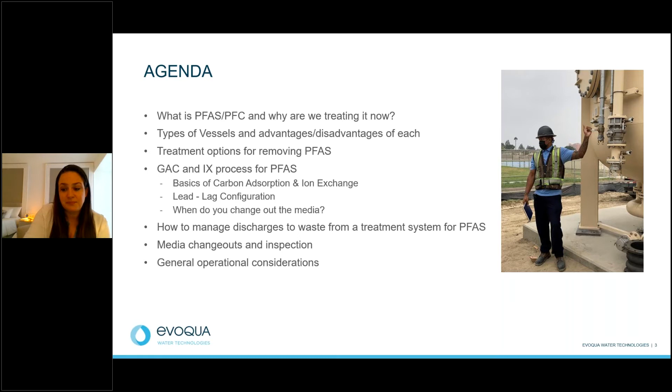As an operator and just general operational considerations. So that is what we'll be spending the next 2 hours reviewing. I'd like to stop every maybe 20 minutes and see if there's any questions, discussion, and then we'll just keep going. So know that although we're here for 2 hours, there will be moments that you get to break and breathe a little bit. With that being said, I'll jump to the first thing.

So what are PFCs? PFCs, also known as per- and polyfluoroalkyl substances or PFAS, were used and are still being used in stain, oil, dirt-resistant materials, firefighting foams. Anything that has some stain or water resistance is what's kind of using it. We've probably heard of Teflon and things like that. It has wonderful properties for being resilient and not breaking down. And that's the exact reason why now it's an issue to treat. They stay for a long time. You may have heard of them as forever chemicals because of this wonderful quality to not break down too easily, which makes them great for a consumer product, not so great later on in the environment.

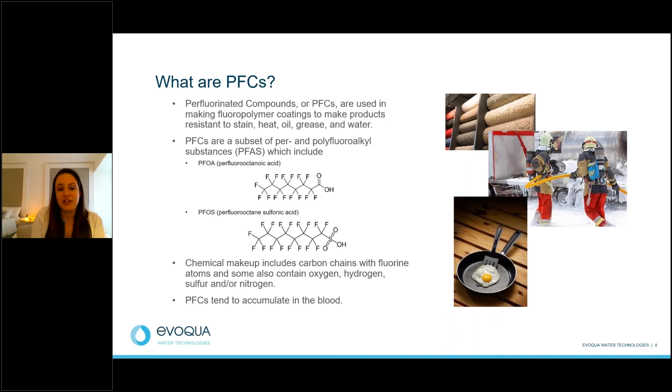They are made up of a carbon chain with fluorine atoms, some oxygen. And the reason they're of a concern right now is they don't break down very easily and they tend to accumulate in the blood. It has been found everywhere in the world, including the Arctic and Antarctic. It's just pervasive, it's everywhere. And the reason it's a concern now is it's been linked to effects in growth, development, reproduction, some cancers, non-Hodgkin's lymphoma. They're still in the early stages of studying it, but it has been linked to some hormonal and immune issues.

So in 2016, the EPA came up with some lifetime health advisories for 2 of these compounds. Taking a step back, there are about 5,000, potentially more, compounds that fall under this group of chemicals. The 2 that we're most concerned with right now because of the current regulations are PFOA and PFOS. Back in 2016, the EPA came up with a lifetime health advisory of 70 parts per trillion for the combined concentration of PFOA and PFOS. Again, those are just 2 of the thousands of other compounds in this family. It was non-enforceable, non-regulatory, but it started to create health awareness and concern.

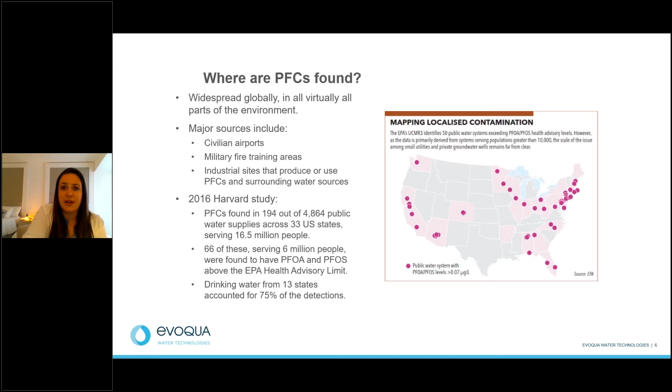And drinking water from 13 states accounts for 75% of the detection. So it is a little bit localized. And in Southern California, we're definitely feeling it.

So the next part of my presentation will be talking about the types of vessels that are used. Probably a little bit out of order for this presentation, but traditionally what we're seeing in this area is using either carbon or ion exchange as a treatment solution. So I'm going to talk about the types of vessels that are out there for use with carbon, ion exchange media, and potentially some novel sorbents depending on what those are. So I'm going to jump into a little bit about the different types of vessels out there and the advantages of each and challenges of each.

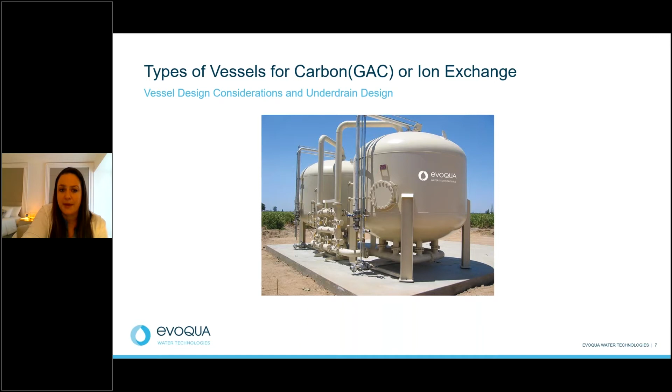So going back a little bit, most of us have seen these large vessels. They tend to be 10 or 12-foot diameter vessels. With PFAS, the larger vessels are a little bit more popular, and I'll get into why that is. But this is what they look like. The footprint is roughly, for a system, which is 2 vessels and the piping, roughly 14 feet by say 25 feet, somewhere in that range for a single system. And a system, when I talk about it, is the 2 vessels with the interconnecting piping tree and piping. So as this picture depicts.

So when you're considering a vessel, you want to look at the under drain design. There's several different under drain designs, and I'm going to touch on 3 of them. The things you want to consider are the flow distribution. Are you getting complete usage of all your media? Are you minimizing pressure drop? In other words, are your pumping costs going to be impacted by what you choose? How easy is it to perform a media change out service? How easy is it to maintain the vessel? Are you going to be in there replacing parts all the time, or can you plug it in and not worry about it for years and years?

Also, speaking of maintenance, what about the vessel lining and other parts that may need repair and maintenance over the years? And lastly, vessel height. Sometimes these are in residential areas. You may want to consider the height of the vessel and how that might impact the residents nearby or building regulations.

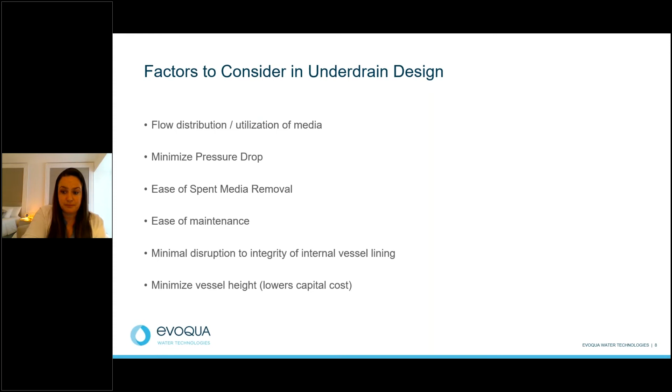So the 3 under drain designs I'm going to focus on today are the hub and lateral, the internal cone, and the external ring header. The picture I showed a couple slides back is the external ring header. That is the one that Evoqua predominantly offers, but we can provide the others as well. And each system kind of has its pluses and minuses.

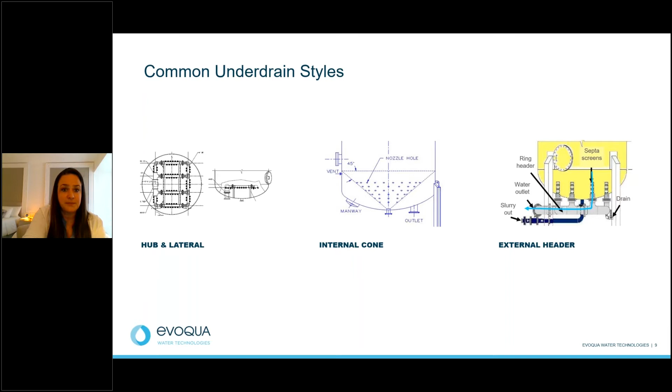All right, so first we'll dive into the hub and lateral system. The advantages of this system, let me go back to just what it is first. There is usually like a center line and then a bunch of radials, or in this case, kind of like an H pattern, where the water goes through this hub and lateral system with a bunch of nozzles to collect the treated water. So this is at the bottom of the vessel. The media sits atop it. The influent untreated water comes in the top, goes down to the bottom, and then the clean water goes through these nozzles, then through this network of pipes and out the effluent.

What's nice about this system is it does have good flow distribution because there's lots of nozzles, tends to have a low pressure drop, and because it sits within the bottom of the vessel, it just kind of gets bolted. You can see the crossbars there where it's attached. You can line the entire interior in a single coat. There's no additional seams, and then this unit sits there. So it's good from a point of internal coating being one consistent piece.

Disadvantages: large number of nozzles. If you're going to do maintenance and have to replace a broken nozzle, which sometimes happens, you'll have to evacuate the media, you'll have to do confined space entry, and it could be a little bit more maintenance. Also, it's a little bit more challenging to do a media change out because you have to work around those laterals. Not terrible, but just something to consider.

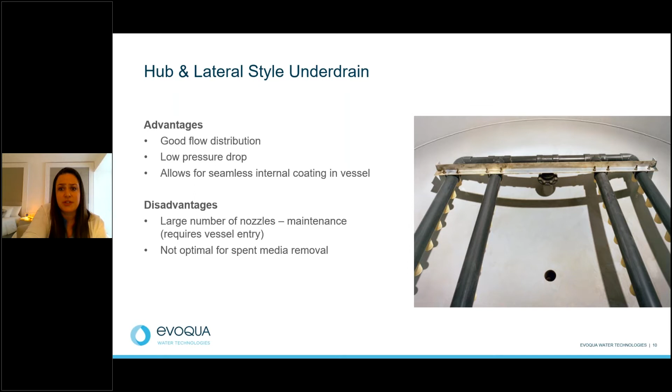I do not oftentimes see this design in the size systems that most municipalities are using these days. You know, larger flows, I don't see this too much. The next two are what I most commonly see in most municipal drinking water systems. The next design is an internal cone style underdrain.

From the outside, it looks like a large cylinder. They tend to be a bit taller because inside they've accommodated for this cone. And the cone has many nozzles. I think in a 12-foot system, there's somewhere around 120, 130 of these little nozzles. The advantage of this design is good flow distribution. Got a lot of nozzles, a lot of flow. You're really getting your media used.

The disadvantages of this one are, again, there's a lot of pieces here, right? You've got 100-something nozzles, so there's a greater chance of something breaking. And to make a repair, you have to do confined space entry. The other thing with this design is there's the outside shell and then this internal cone. So you have to do confined space entry under the cone to change out the nozzles. I've had some customers where you have to clean out that under kind of dead space on occasion. So maintenance could be a little bit challenging with this design. But overall, great flow distribution.

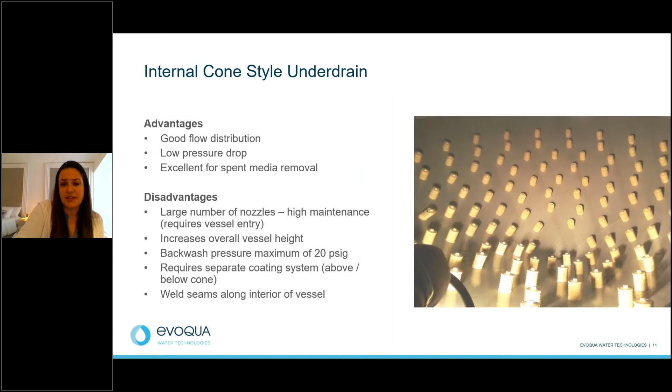Okay, one more question. Where does the cost lie in pros and cons of the different systems? Okay, so hub and lateral, I think, is the least expensive. Cone bottom versus septa, they seem to be pretty similarly priced in the market. So equipment wise, very similar. It kind of comes down to preference of design, and then maybe some height restrictions, right? The cone bottom is another 4 to 5 feet taller than the underdrain design, so sometimes that presents a challenge.

Okay, that's all the questions we have that I see right now. Okay, then we'll keep going.

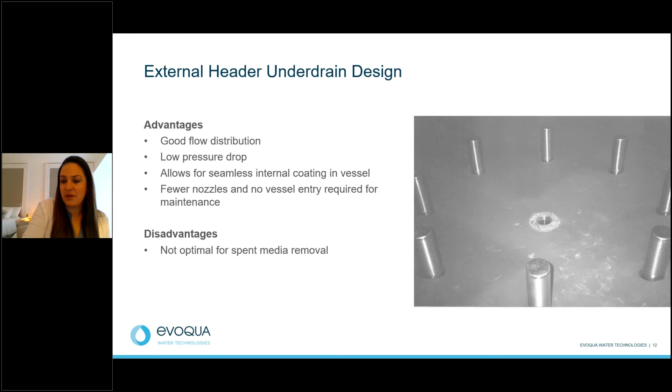The next thing I'm showing here is, depending on whether you're using ion exchange resin or carbon, you may need a distribution header at the top of your vessel. Resin, when it's flooded, gets very fluid, right? It's very light and fluffy, and it likes to move. So you have to do an inlet distributor. Now this is at the top of the vessel, so the water's coming in the top. This inlet distributor diffuses it and causes it to spray, so that it's not just pounding down on the resin and potentially moving it out to the walls. If you picture it just shooting down from the middle of the vessel, it would cause all the media to expand out and create kind of like a canyon in the middle. And then you would get short circuiting, you wouldn't get the best use out of your resin.

Now carbon is a little bit more stable. You don't need quite an elaborate inlet distributor. You can do more of a single point with a hat that still causes the spray, but you're not so worried as with resin. Resin moves quite a bit once submerged.

The reason to touch on this is you want the top of your media to always be as flat as possible. You don't want it to tilt to one side. You don't want it to blow out towards the walls. You also don't want it to cause a cone in the middle. And the reason is, if it's not flat, water is going to find the path of least resistance. So it's going to go to the shortest part of your bed, and it's going to ignore all that other media. Once you're operational, your media becomes your most expensive part of your operation, right? So you want to use every bit of it that you can. And getting proper distribution and keeping that bed as flat as possible is key.

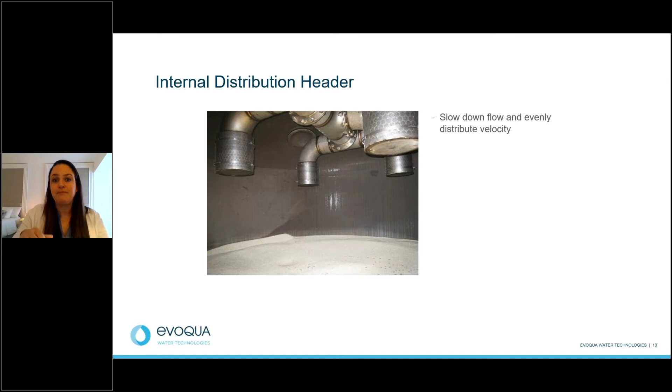One of the questions that came up was calcium, right? So if you've got anything in your water that might foul your media, you want to take care of it ahead of time so that you don't get that crust layer, anything that could be impeding the flow in your bed. So that's inlet distributors.

Next thing on a vessel, we'll have sample ports. These are used to track where the contaminant is in your bed and how your usage is going. So we talked about if the bed's uneven, it's going to go towards the shortest part of the bed, path of least resistance. Sample ports at the top, middle, and bottom 25% of the bed, or we call this the 75% port, the one that's the lowest, help you track how the contaminant is moving through the bed. And it's a great tool to figure out, oh my gosh, there's something going wrong inside, right? Because once these are loaded and turned on, you're really not opening up the manways to check on them. So this is a way to monitor what's going on.

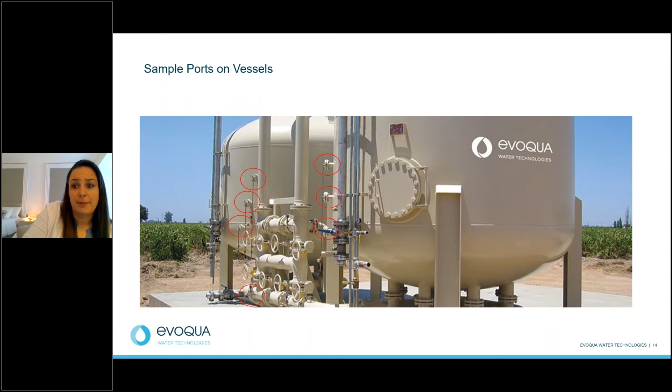Each system, there's usually 3 or 4 along the side. And then there's another one at the effluent. At the bottom of this drawing, you can see almost near the cement, there's the effluent. Or in this case, if the left vessel is your lead and the right is your lag, that would be the midpoint between the two. And then on the opposite side, it's kind of hard to see, there's a little blue cap there. That would be your system effluent coming out of the lag. So this is used to do your sampling, to meet your permit, and then also to help you track how your media is performing.

What does an ion exchange system look like? So their ion exchange and carbon systems are very similar. Some of the differences, we talked about that inlet distributor, and ion exchange needs one that can spread out and slow down the flow a little bit more. Also needs smaller mesh size screens at the bottom, so that ring header, so it can accommodate the smaller beads.

It also needs pre-filtration. So down here in this little schematic, you see these 2 little pre-filters. We recommend a minimum of 5 micron pre-filtration, a minimum of 10. 5 is best practice. And with ion exchange resin, you really want to prevent any type of fouling. So the scaling, the silt, anything from that could possibly coat the sides and prevent ion exchange from happening.

So definitely in an ion exchange, I often get asked, should I do this pre-filtration in my carbon system? You don't need to. It does increase pressure drop across the system. But if you know you have a lot of silt or some other sand coming up from your well, it's maybe not a bad idea. And if you are having pressure drop issues, maybe go up to the 10 micron for carbon. But carbon, I don't always see these pre-filters unless you know you have an issue.

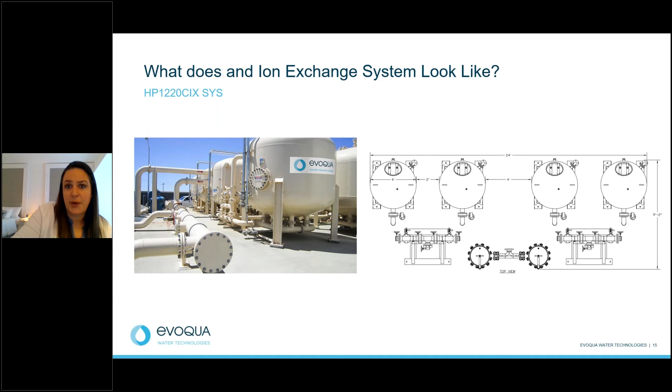Another question I get with pre-filters is, how often do I need to change them? Varies greatly depending, again, how dirty your water is. They're usually changed out when the differential pressure increases 10 to 15 psi over a clean filter. Or it could be limited by even less than that depending on your pumping capabilities. Sometimes people have to put a booster after this treatment system to accommodate their distribution requirements. So that's what a system looks like, ion exchange. Carbon's very similar, just take those away.

Now, how did we determine what we were going to use and what is the best technology? It's kind of starting to now address the question I got earlier. We can do pilot testing or RSSCT. Pilot testing is actually out in the field where you are treating a, oh my gosh, I'm blanking on words, a slipstream from your well. So your well is actively pumping, you're slipstreaming a couple GPM, and we're running it through these little 3-inch columns, and it mimics your real life situation.

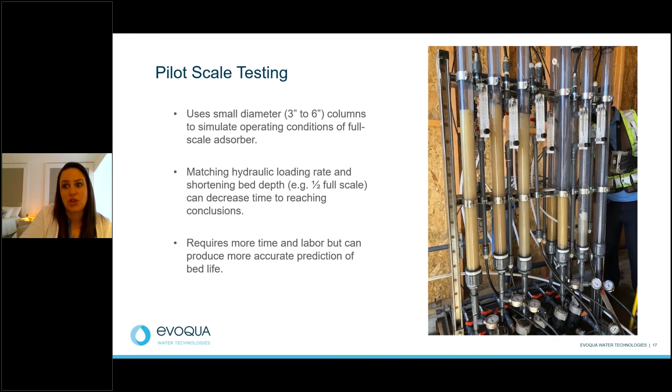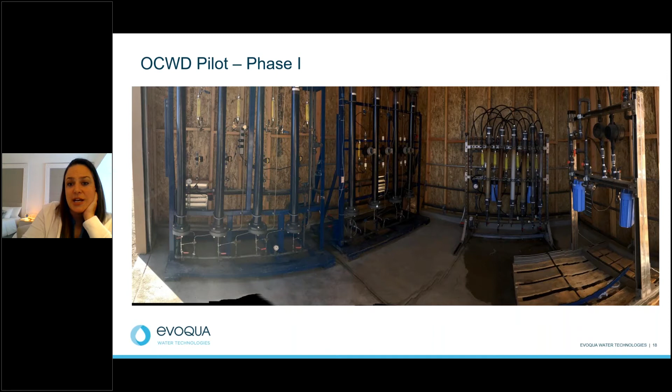In the example here, there were multiple columns and we were testing different ion exchange. And then in the far right, those were some novel sorbents. You can't see into this picture, but there was an adjacent skid with slightly larger columns for carbon. And we were testing a variety of carbons to see how they all compare treating the same water. Got some great data. To give credit where credit is due, this is a pilot over at OCWD. They did a very extensive testing, I think 8 or 10 different carbons, as well as 6, I think, ion exchanges, novel sorbents, and now they're doing a phase 2 with even additional medias. Oh, here's their pilot. They call it phase 1. Here you can see they also had pre-filters, the 5 micron to mimic real life conditions.

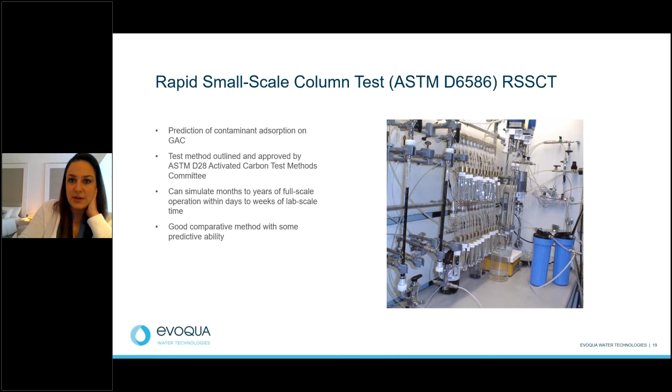Oops. Sorry, my computer voice is freezing. Okay.

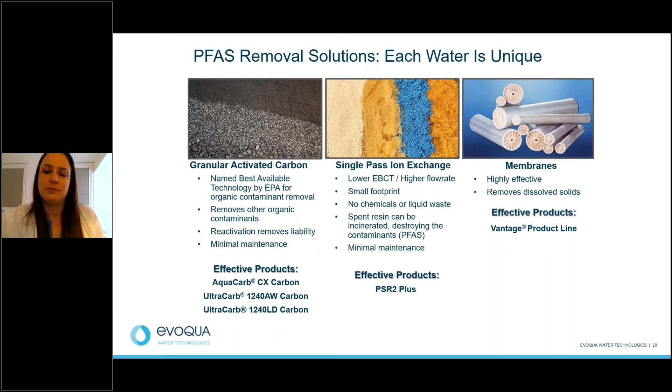One more question. Was the GAC that was tested for PFAS removal virgin coconut based or bituminous coal based? They tested both. Right now we're seeing the best results from bituminous and subbituminous coal-based carbons. Those tend to have better results for treating PFAS. The coconut has a tighter pore structure, and I think for that reason, it's just not removing as well. You do get some removal, but when you talk about life expectancy of the media, we're seeing longer life expectancy with bituminous or subbituminous products. That's all the questions we have right now.

So here's going into a little bit more detail. I kind of touched on this on the earlier slide. So resin, you only need 2 minutes of empty bed contact time. Empty bed contact time is a function of how much media, the volume of media in your vessel, and the flow rate. So for resin, you need a minimum of 2 minutes to get removal of PFAS. Carbon, you need 10 minutes. RO, you also need 10 minutes. This is repeating itself, so sorry about that.

Because you can run a higher flow, so using the example of that large 12-foot system I showed earlier, using resin, you could feed 1,600 to 2,000 GPM per system. Most people are planning around 1,600 GPM because as you go up to 2,000, the pressure drop goes up exponentially. So there's like a sweet spot around 1,600 GPM where your pressure drop is reasonable and you get great flow

through a system. That same equipment treating carbon, to accommodate 10 minutes empty bed contact time, you can treat 500 or up to 550 GPM through the same equipment. So you can see you would need 3 times as much equipment to treat the same flow using carbon as resin. So when we talk about larger footprint, that's how that relates.

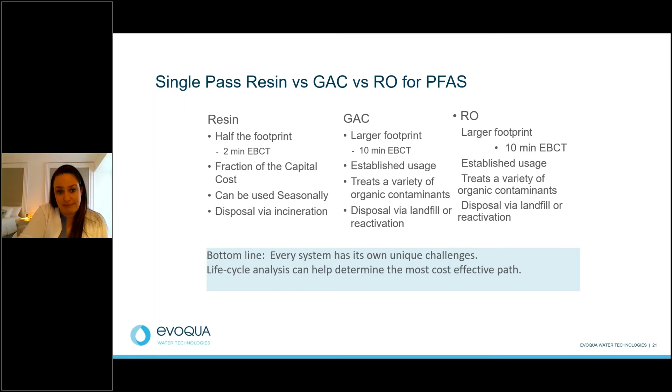All those things. And then as far as actual water quality, I need to know the sulfates, nitrates, chlorides, TOC, your PFAS concentrations. I want to know what else is in there competing. Do you have any VOCs you're also treating for? Do you have PCE, TCE, any of those things that we need to take into consideration? And then with that information, I can do models and show you what your options are. From there, you can decide, okay, I want to go to a pilot or RSSCT, or kind of figure out your next steps. But you do not need to jump right into buying and spending all this money on pilots right away. So don't stress about feeling you have to go that

And some of those are going to fall to the short chain. So when we're evaluating technology and the best choice for you, we'll also want to look at what short chains do you have and which media is working best for those. Right now, I'm seeing the resin doing a great job with the short chains. But short chains are also removed by carbon, so please don't be fearful if you have carbon that you're in bad luck. But this is what they're talking about.

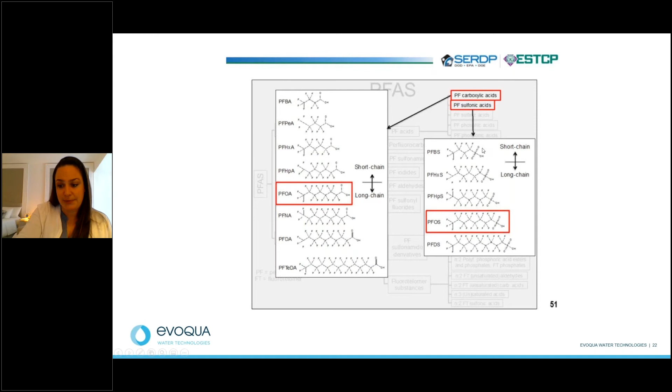So if you hear the term short chain versus long chain, they are talking about the carbon backbone and some of this PFHxA, PFHxS, PFBS. These are some things that you'll start seeing that we're going to be monitoring and could be added to the regulation.

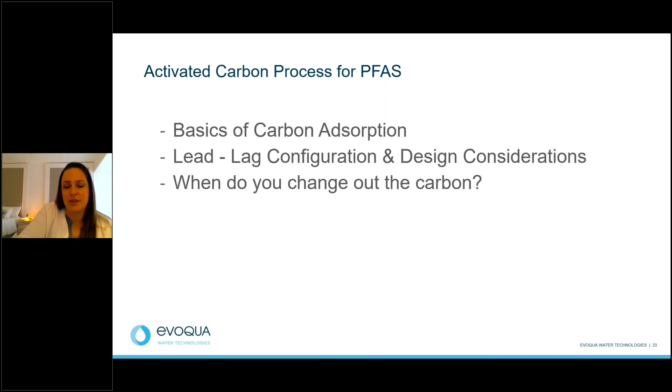So now I'm going to go back and talk about carbon and kind of how it works, the basics of carbon adsorption, lead lag design considerations, when do you change it out? I call this like carbon 101, right? How does it work? Why does it work? And why is it effective for PFAS?

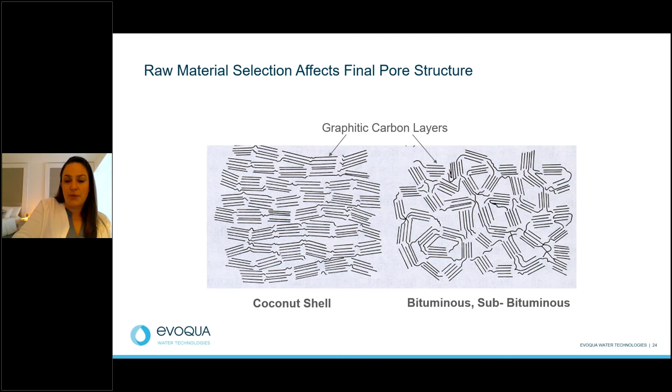One way to look at it is that pore space is kind of like highways, and then there's streets and alleyways. Bituminous and subbituminous has a lot of highways. Big stuff can get through. And we're finding with PFAS that seems to be helping.

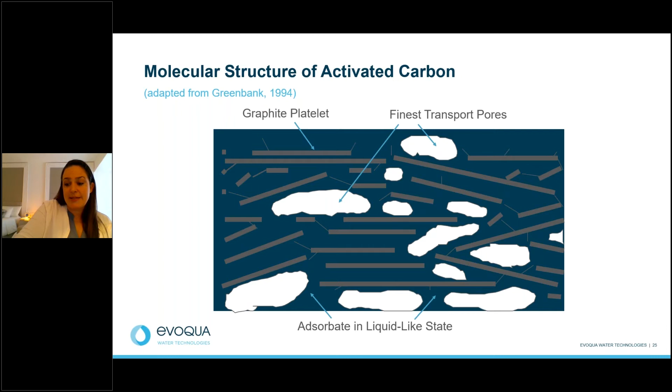Another little infographic that shows that idea. Transport pores, where the white space is, that's your highways. That's where everything is moving through within the carbon. It's getting to those deeper pores. And then along the platelets is where you actually get adsorption. That is where your removal is happening. So the white space is your highways, and the platelets are your parking lot or your garage, right? That's where it's actually going to adsorb onto the carbon. And coconut, the pore structure, the highways are a little bit smaller, and only smaller things can get through.

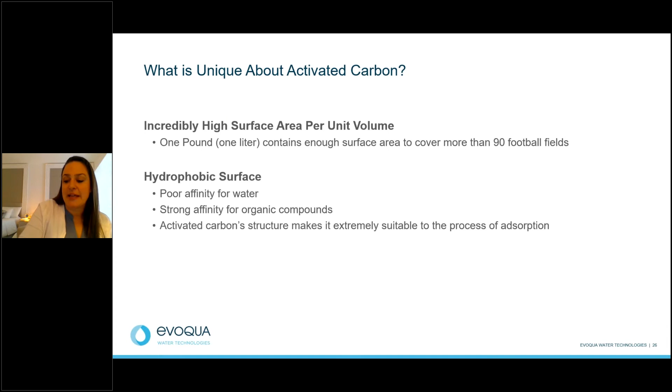What is unique about activated carbon? So carbon has incredibly high surface area per unit volume. So 1 pound contains enough surface area to cover more than 90 American football fields. It's remarkable how much pore space is available there. It's inexpensive, so great combination. Another thing that makes it good for our use in drinking water is that it has a poor affinity for water and a strong affinity for organics. And then this pore structure that we just talked about before makes it a really suitable process for adsorption. So basically, carbon is our friend. It's inexpensive, has amazing capacity, and can treat lots of things.

Now, I get asked this a lot. What is the difference between adsorption and absorption? So adsorption is what is happening on carbon. It's a surface reaction with those graphite platelets. It's an attraction, right? So it's kind of like a magnet. The contaminant or PFAS wants to stick to those platelets or the graphite layers, and it sticks there. Absorption is, it goes in and it swells. Think of a sponge, how it expands as it absorbs. That is not what's happening in carbon. Carbon does not expand as it gets used up. Everything's just kind of sticking internally in those little pore structures along the platelets.

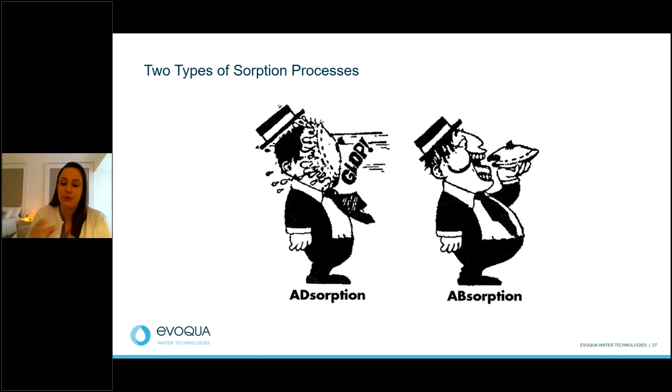For that reason too, certain things that have a stronger attraction will stick better. So depending what else is in your water, the background, it may prefer that over your PFAS. And those are the types of things we look at, A, in the modeling, and B, when we're doing piloting in RSSCT, is how are those background things impacting how much PFAS is being removed.

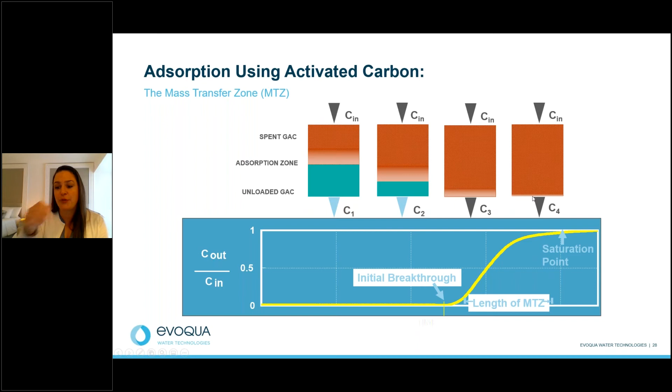In a GAC system, that mass transfer zone can be a couple feet within the bed, or it can be short. You also might see some banding form. Some compounds will break through sooner than others. In most of the PFAS applications, at least that I'm reviewing, PFOA seems to be breaking through before PFOS. So PFOA seems to be the compound that's driving changeouts. This breakthrough is what you're tracking for your permit, and it's going to indicate when you need to change out.

Some best practices for PFAS removal and also just in general with carbon. For PFAS, you need a 10-minute empty bed contact time. If you go any shorter than that, you might get early breakthrough. You're also not going to get the longest life of your carbon. So we recommend 10 minutes. In the past, if you were treating other chlorinated solvents, you might have been treating more around 5 minutes. So if you have an existing treatment plant, you may need to add vessels to accommodate the same flow but longer contact time. So that's something to consider.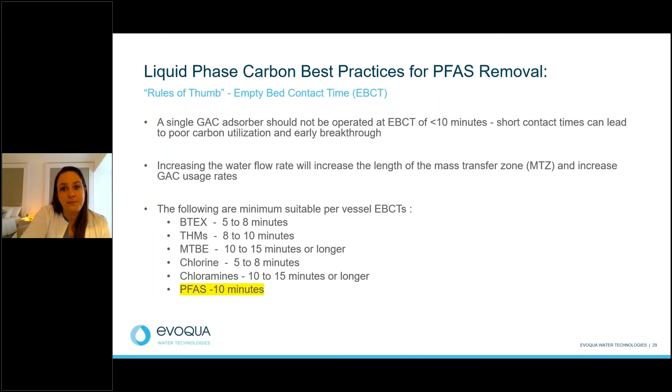Increasing the flow rate will spread out that mass transfer zone, and it can impact your usage rates. And then this bottom bit is just some information about other compounds, depending on what you're removing, to show you the empty bed contact time needed for them. Hydraulic loadings: we want between 1 and 10 GPM per square foot. The sweet spot is 3.5 to 5 GPM per square foot. Hydraulic loading is a function of the flow divided by the cross-sectional area of your vessel.

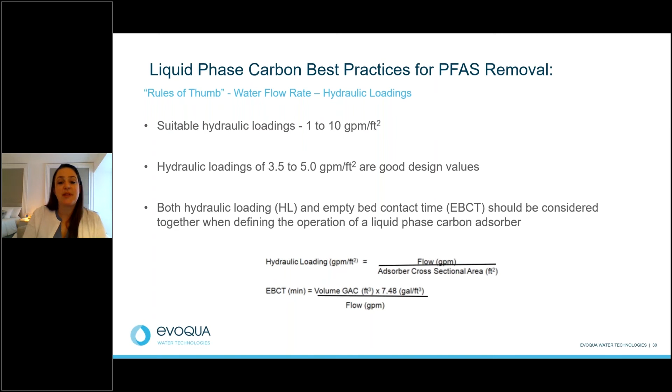So, a 12-foot diameter carbon vessel treating 500 GPM, you've got 500 divided by 113 square feet. 113 square feet is the cross-sectional area. You're at 4.42 GPM per square foot. So you're right in that sweet spot of hydraulic loading. Empty bed contact time is calculated by converting the volume of carbon or media in the bed to gallons and dividing it by the flow. So to get your 10 minutes, that's how you calculate that.

Some basics of ion exchange. Actually, I'm going to pause for a minute. Stephanie, do we have any questions right now? Yeah, we do have one question, and we might want to consider taking a 5-minute break.

Great. Right about now. The one question I have is, can you use GAC in a single pass resin vessel? Yes. You may want to just confirm the nozzles, but it's easier to go from carbon into ion exchange than ion exchange into a carbon vessel. So yes, you may have a little bit higher pressure drop depending on the size of the screens at the bottom. But yes, it's doable.

Okay, great. I don't know if this is a good time, but if we want to take a 5-minute break to stretch your legs, grab some water, and let's be back here. You guys alright? Helps me too. Yeah.

Okay, are we ready? I do have a question if you want to start off with a question first before we get going.

Similar to PCE and TCE removal, would a lead-lag configuration of vessels provide improved protection against potential MCL violation, since the lead vessel is monitored for breakthrough and the lag vessel ensures compliance in the effluent? You might be my favorite student, and a perfect segue into what we're about to discuss. Yes, and I'm going to leave it up there because you actually gave me the perfect lead into about 4 slides from now. So well done.

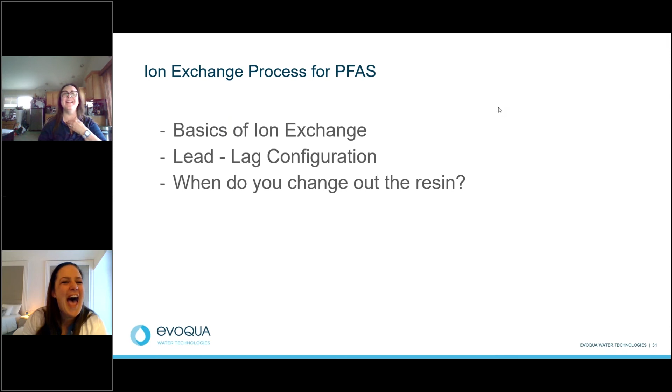Okay. So yeah, I'm going to get into lead lag, about what it is, why we consider it, and all those good things. But first, I'm going to dive a little bit more into ion exchange, the basics of how it works. So we talked about carbon and how it's a surface reaction, and it's kind of this attraction or force that's keeping it sticking to the platelets of the carbon. Ion exchange is a little bit different. Then we're going to talk about lead lag configuration and why it's wonderful and helps everybody. And then we're going to talk about change outs and what they look like.

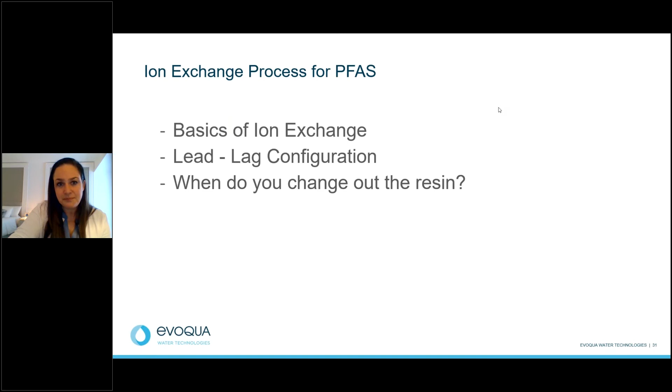I like to use this analogy. Sometimes I get a laugh. I can't see your laugh right now, so please indulge me.

PFOS and PFOA, we're looking at parts per trillion. It is such a small concentration, whereas nitrates and chlorides and these other things might be in parts per million or parts per billion, right? It's factorials bigger, higher concentrations. So if you picture you're a big, strong guy, you go into a bar by yourself, you could probably kick everybody's butt, right? That's PFAS. It's the strongest one in the room. This resin loves it. It's going to stick perfectly. But let's say there's like 20 smaller guys and they decide to pick a fight with you, Mr. Muscles, you're probably going to lose. And that's what's happening in your water chemistry. If you have these other things that aren't as selective, but you've got a lot of them competing with this parts per trillion, it's going to win some of the time. So hopefully you're all giggling. But that's the analogy: if you have a lot of these other competing things in the background, it's going to impact the life of your resin.

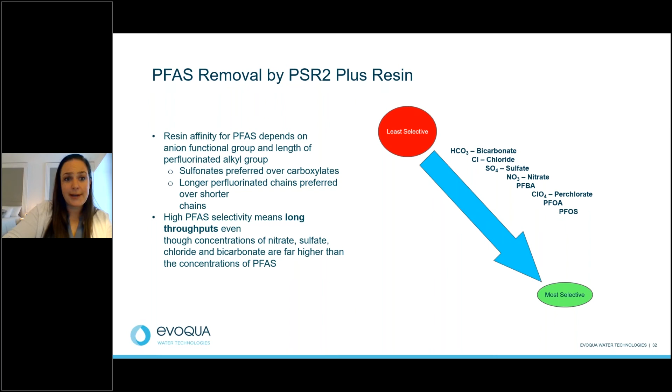PSR2 Plus is fairly uniform. It's a much tighter distribution. So this, you can kind of see it in this picture. The reason for that is we found at this size, we're getting excellent capacity without very high pressure drops. Sometimes when you have more smaller beads, it packs a little bit tighter and can cause pressure drop increases across the bed. So this was kind of the sweet spot as we found it.

One other thing I get asked is, it's a gel-based resin. What that means is the actual plastic beads that are used to make this start from a gel substrate. It is not gel in the fact that you could squish it, and it's not squishy. They're hard, they're kind of like glass. They do not compress, so it's not like as your system's up and running for years that it's going to compress over time. It is like glass. They're extremely hard. It's the substrate used to make the plastic beads that is a gel.

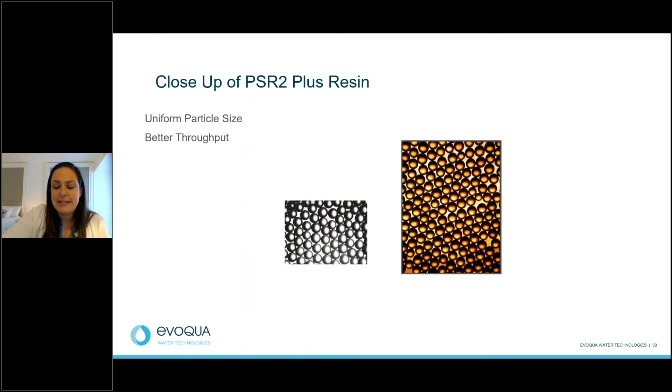So a little bit more about resin and PSR2 Plus. It is NSF 61 approved, so this is what we talked about of the drinking water standard. It has been approved in many drinking water sites in Southern California. Right now, it is the most commonly used resin for perchlorate and PFAS removal. So I'm not having any challenges getting it approved for permit. We talked about those acceptable products listed on your permit. This one they're very familiar with.

Because of PFAS, I am seeing they still want to see these pilots or RSSCTs to demonstrate that with your water, it's getting similar results to your neighbor a mile down the street. I am hoping and praying that they start to let up on that and just say, hey, my next door neighbor's using this, can I too? We're not there yet.

Resins can remove both shorter chain and the longer chains. So let's say this new regulation comes out and now there's one more thing you have to track. Your existing treatment system, whether it be resin or carbon, still works. What's going to change now is your breakthrough. So depending on which of these compounds breaks through first, instead of lasting, say, 280 days, now it's going to last 270 days because now you're tracking this other thing.

So a big question I get from people is like, gosh, I just spent all this money. As the regulations change, am I going to have to buy something new? Not necessarily. What's going to happen is you'll probably have to change out a little bit sooner. But the same equipment, same media right now is going to do the trick.

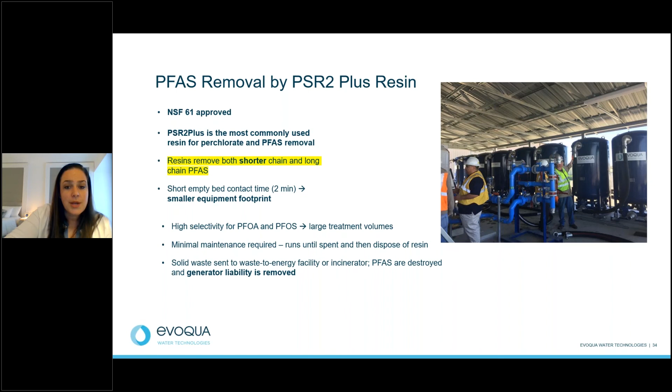A lot of stuff is kind of the same as we said. So what is a resin bead? A resin bead is basically a plastic bead with all these little fixed positive sites and then chloride anions that are what's exchanging. So it's physically exchanging a chloride for your PFOA or PFOS or nitrate or sulfate or all those other anions you have. So if you want to picture your little bead with all these hands, there's only so many hands, right?

It can only grab so many things. And once all the hands are full and holding on to something, your bead is spent. It does reach an equilibrium, but when you say spent, it means every hand is holding something and you're done. It can't do any more. But it is exchanging a chloride for your contaminant. So you might see a slight rise in chloride concentration in your effluent, especially just at the initial startup. Another fun thing that you'll see is if you have nitrate in your water, you might get complete removal for like the initial day or so. Some people get really excited. Don't get too excited. It will break through pretty quickly. And then it's not the magic bullet that will also remove nitrate.

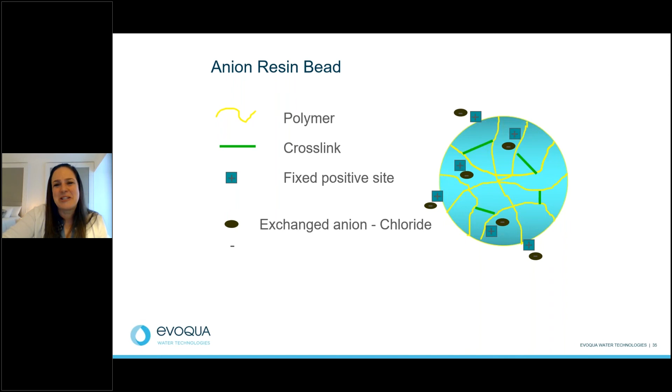Here's a nice little graphic showing that chloride exchange. So basically you're releasing a salt and capturing the PFOA. Any questions at this point?

Yes, we have one. Can the little vessels be placed in lead lag configuration as well? Yes, yep. We also have done a large manifold so that you can accommodate a bunch of them and set them up in parallel, also in series. So like, let's say you needed to treat 1,000 GPM, you put 5 in the lead position, 5 in the lag, hook them up with cam lock fittings and hoses up to this central valve tree. Or you could just hook up hoses from the lead to lag and keep it super simple.

But yes, absolutely. Okay, that's all the questions right now. We've even had some sites that were more industrial with very high concentrations where we've done mid lead lag using the small ones, so that you can get even more efficient use of your media.

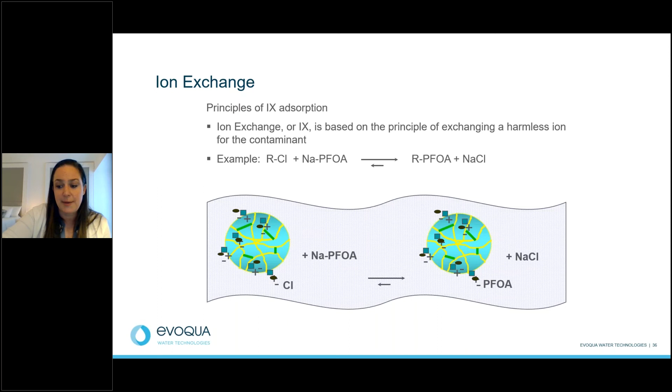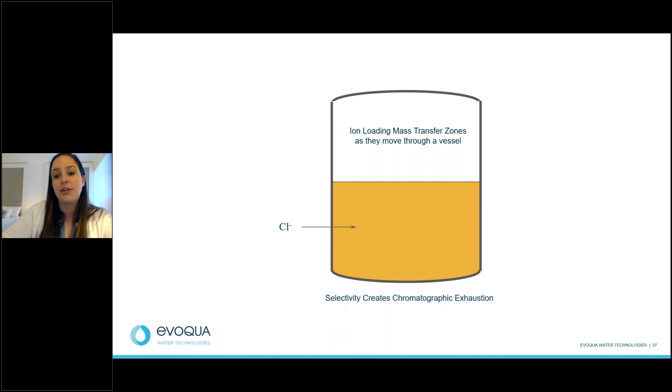All right, so we talked about this before. This is just a fun little graphic that shows when you have a new ion exchange bed, it's all in the chloride form. It's all fresh resin. And then as you start to flow water through it, the chlorides get bumped off and it starts absorbing nitrate, sulfate, and PFAS. Now, if you remember that selectivity chart, you start to get these banding, right? The things that are more selective stay to the top, stay stuck to the resin. The things that are least selective start to slough off.

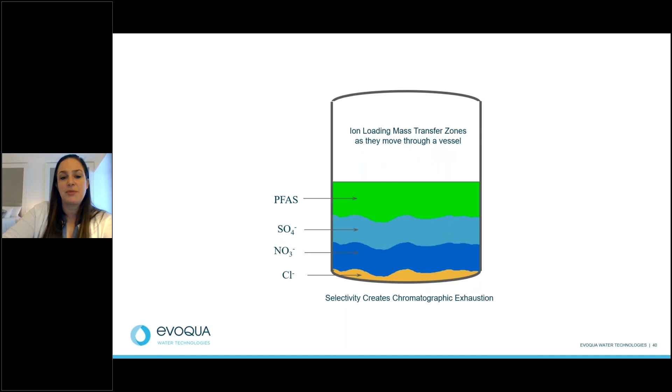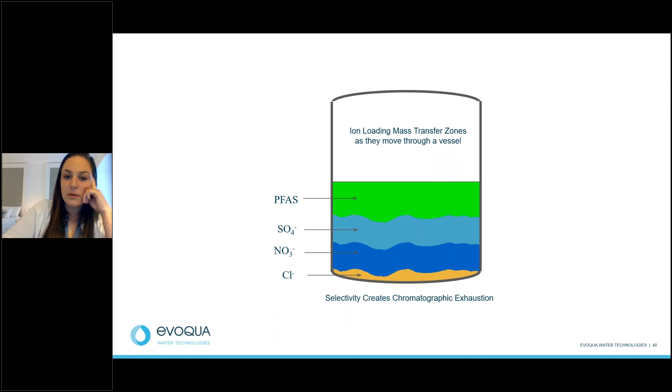All right, so lead lag configuration. This is now going into answering the question that was asked right after break. When do I change out the media? Do you have to change it out as soon as there's breakthrough in the lead vessel? And can I switch the vessels so that the lag becomes a lead? And what are the advantages to doing that?

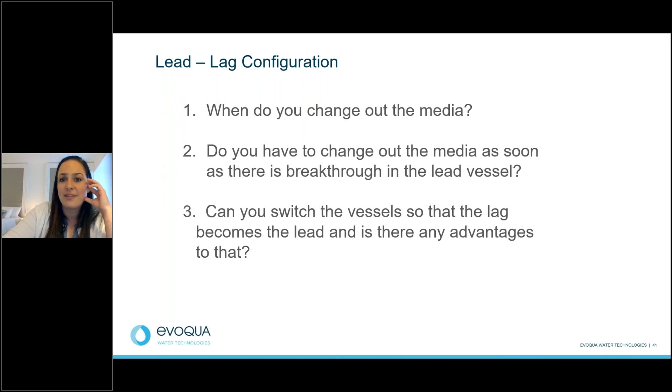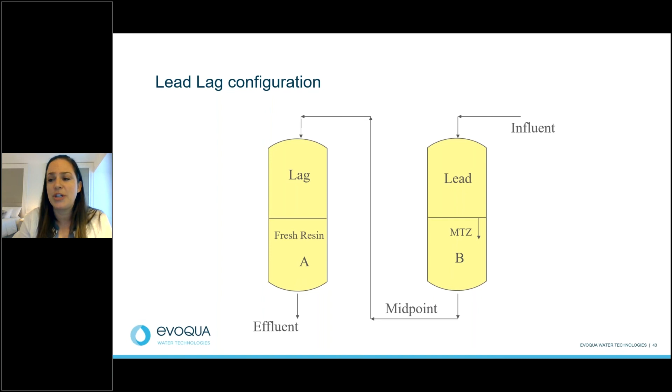So when you're starting up a new plant and you have two virgin beds, you're going to get the longest lifespan you've ever gotten. On the second change out, you'll see a shorter one because that lag bed is already partially spent. By the third time, so the second change out, back when A becomes the lead again, now you're going to see a trend of what your bed life is. So any questions here about how you run a lead lag?

I don't know if there's questions on that, but I do know that there was another question that was piggyback. I believe it's off of the question regarding the little vessels being placed in a lead lag configuration as well. Sure. What is the cost difference given the same flow? Gosh, I don't know. I can follow up with you on that. I know those little vessels are relatively inexpensive. They also hold less media. So, you know, I don't know. I'd have to look at that and compare.

Okay. We have another one. What lead time in ordering? So those little vessels are usually on hand and can be delivered. They're oftentimes used as rental. The large ones, we have rentals that can ship immediately. And then for purchase, if we're building from scratch, lead times around 22, 24 weeks. We do have some on the shelf, so it just depends. It's kind of first come, first serve. But if you're starting from scratch and want us to build for you, it's about 22-week, 24-week lead time.

Okay. Any other questions while we have a minute? Nope, that's it for right now. Okay.

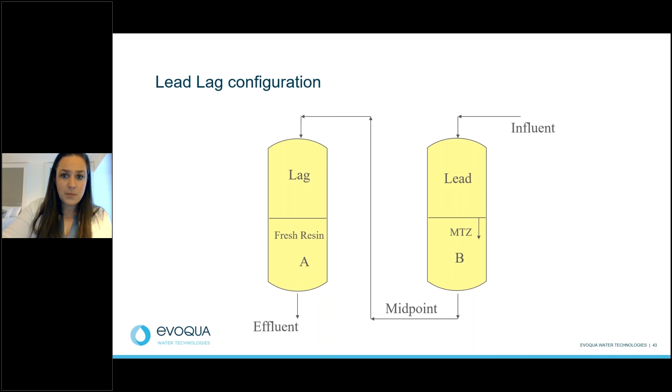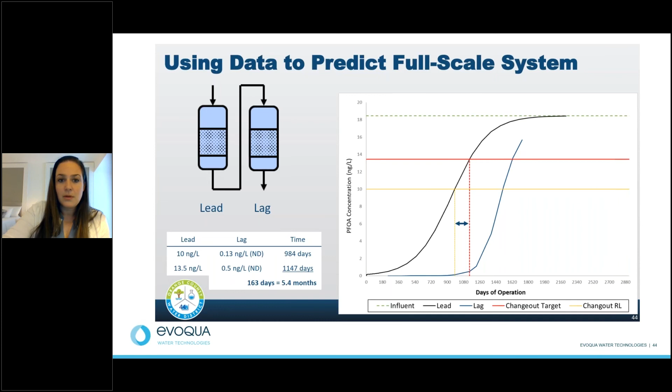This is sometimes done, let's say one of your sample taps, you're getting a detection or you're getting weird readings. Let's say your 75% port has a higher concentration than your 25 or 50% port. That's triggering like, hey, something's up. Can you come look at this? Are we getting channeling? Did the bed move? Are we getting short circuiting? What's going on? In that case, we would drain down the vessel, open up the manway, and try to take a look in to see, is that media flat? Or is it shifted to one side? Is it coned up in the bottom? Is it hollowed out in the middle?

What's going on? Is there a crust? So that's what we do during an inspection. We tend to only do inspections if some of the things you're monitoring are triggering, like, hey, we think there's a problem, or it's during a change out. You really don't want to open up the vessel once it's operational because you risk contamination and disrupting the bed.

But this is something you can do. If you get a crust buildup or some fouling on the top of your bed, it can be dealt with. We can scrape it off, package it, dispose of it, and then you keep running. So there are ways, even if you run into a problem, to try to rescue it a little bit. You may still get slightly shorter run times than if everything was perfect, but know that not all hope is lost if we find a problem. So that's what an inspection looked like.

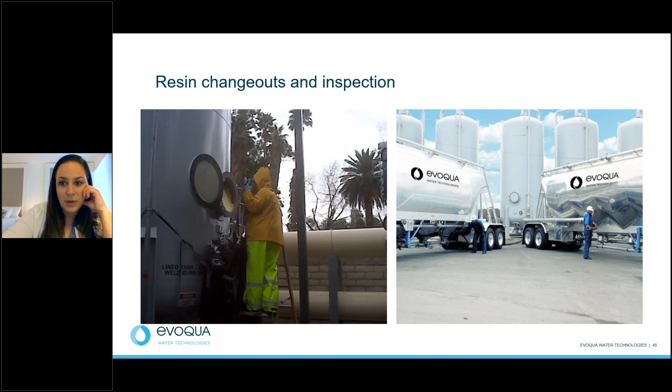The resin goes through a preparation step before it gets delivered. So one of the questions is, what's your lead time? We need to allow time to prep the resin, and also the slurry trailers that are doing the work. Prior to every job, the slurry trailer, the hoses, everything that's handled goes through a food grade washout and is sterilized. As the customer, you are welcome to ask for all those tickets demonstrating that that was done. It gets done between every job. So even if we use the truck the day before to do someone else and did it that morning, it's going to get done again before we come to you.

The resins go through a pre-rinse procedure. Our facility that does it is located in Los Angeles, so it's pretty close to most of you. And the reason we rinse it is it's plastic beads. During the manufacturing, there's some residual chemicals and manufacturing material left on it. So we go through this rinse procedure to make sure that once it's delivered to you, you can pretty much rinse it for a short time for your BacT and then put it online. There's no backwashing. There's no long extended procedure you need to do on site. They're pretty much ready to go. We do recommend flushing for about 30 minutes to drain on site, namely so that you can get the cleanest BacT sample. You want to open up all your sample taps, everything, and make sure you're getting a good sample. But as far as the resin goes, it is ready to operate as soon as it's delivered because of this pre-rinse we do.

We use slurry water. Nothing is touched by humans. The vessels stay sealed. The manways are not opened unless we're asked to open them for inspection purposes. If there's confined space entry or work done inside, the vessels need to be sanitized before we refill. So for that reason, we usually leave everything sealed up and do a change out using the slurry connections.

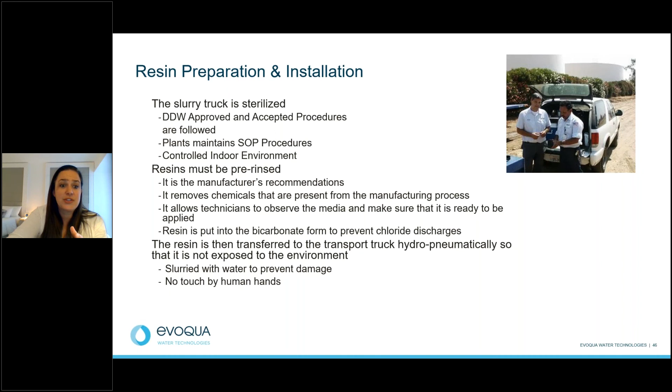When you need a change out, so you're doing your monthly, your quarterly, whatever your permit dictates, you're monitoring, and you hit that trigger point. Usually permits will say, get your confirmation sample, and then you have 30 days to change out. With PFAS testing, the results can take about 10 days to 2 weeks to get. So by the time you're getting that confirmation test, you may only have a couple more weeks left before your permit dictates you need to change out.

Not a problem. It's nice to be in touch so that we're communicating if you're starting to see breakthrough, like, we hit 2, we hit 3, and your change outs are when you hit 5 or 6. So at least we're trending it and we're aware that this is coming up in a month or 2 or whatever it might be. But when you hit that trigger, you just call up and say, I'm hitting the trigger. Can I get on your schedule for the next week or 2? We get you on the schedule and then provide this procedure.

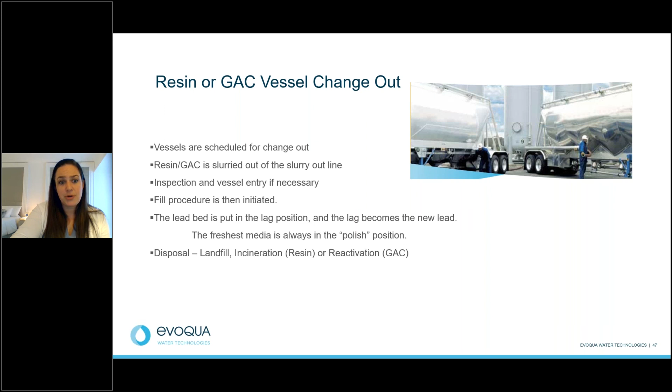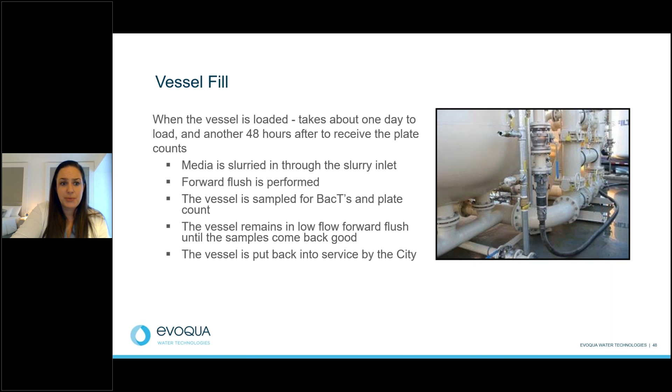Some considerations during a change out. So carbon: after you sluice in the fresh carbon, you flood the vessel and allow it to soak overnight. The following morning, you have to backwash the carbon. The reason we backwash carbon is to remove fines and to stratify the bed. It gives you the best performance, the least pressure drop across the bed, and just sets you up for success right off the bat. Again, we talk about forward flushing following the backwash, but backwash is required the next day.

The reason we allow soaking overnight is to remove any air bubbles that are in the fresh resin. I'm sorry, carbon. Carbon has all these pores, right? You've got to give the water time to work its way through all of them and to allow that air to dissipate out. That overnight soak is what does that. If you rush that step, you may not get as good a startup of your carbon.

Resin. Now resin, repeat after me. I am never ever going to backwash resin. Everybody say it. I am never ever going to backwash resin. This resin, you put it in, you're good to go. Don't ever backwash it. It does not need the stratification that carbon does. It doesn't need the air release. It's good to go. Backwashing it will disrupt your mass transfer zone, and you can lose some resin during it. Just not needed. So never ever

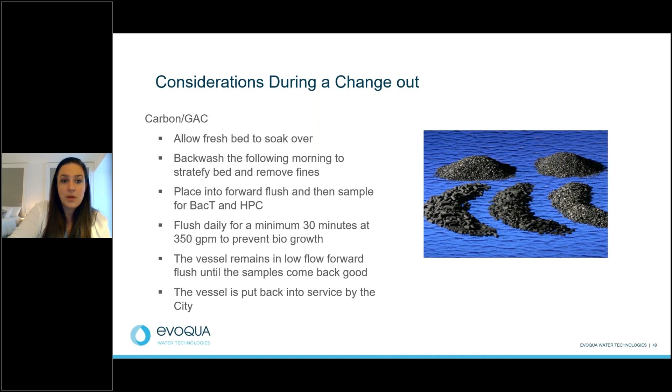backwash. In some of the new systems that are dual use, the piping says backwash. Take off that sticker. You do not need it if you're using resin. We do recommend the daily flush to prevent biogrowth, or keep it in low flow if you can to waste until your bacteriological tests or your permit allows you to go into service.

Some things to consider if you're going for long-term or short-term shutdowns. If you are going to do a long-term shutdown, which means months, or a situation where the well's down and you can't do a daily flush, you want to drain the vessel and then, before bringing it online, flush to waste at as high a speed as you can, the highest flow rate to waste, for 90 minutes up to 3-4 hours, depending on how long the system was offline.

All right, that gets me to how to manage the waste, the discharge from the system. During startup, when you're flushing to waste, I get the question, do I need to treat that water? Do I need to capture it? If it spills on the ground, am I spilling PFAS water? No, it's treated. It can go just to your sewer. You probably don't want to send it to distribution or into your ponds. It should go to drain, to sewer to waste. But there's no additional treatment that needs to be done.

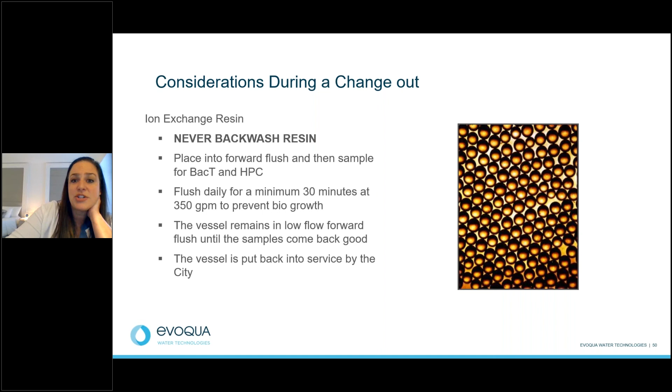You should plan on, for carbon with your backwash, using about 15,000 gallons per vessel. And then the daily forward flush to prevent biogrowth is 350 GPM for 30 minutes. So what does that work out to be, like 9,000, 10,000 gallons, something like that. So just be able to manage that. For that reason, sometimes people stagger the flushing depending on the limits of their sewer permit or system. They can't flush all of them at once, so they stagger it to accommodate those limitations.

Some things to monitor on a daily basis. Before I get there, are there any questions?

Yeah, we have one question. Have you ever had issues with constant high HPCs within the GAC vessels, but extremely low HPCs at the well and the filter bag housing?

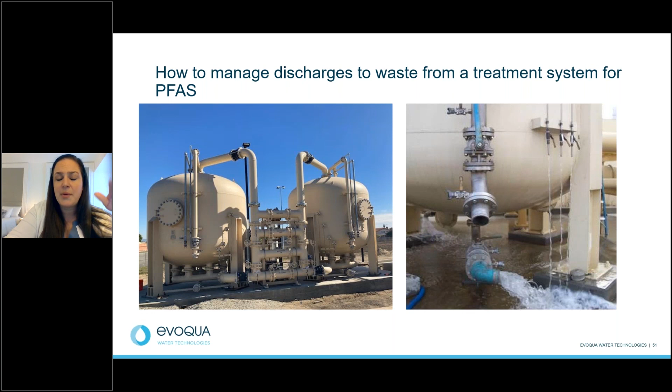Absolutely. So GAC is that perfect breeding ground. It's dark, it's wet, there's organics. It's the perfect breeding ground for bio. So oftentimes there could have been something that was seeded, like you're not seeing it at the well, you're not seeing it in the filter bags or the pre-filters, but it somehow got in. It could have gotten in from one of those and then it just thrived and exploded. So it's not uncommon for carbon to get a bio issue. That's why the daily flushing to prevent it is so key, because it happens way too easily.

It did get seeded somewhere. The challenge is, even if you had low levels before, it could have been enough to be that starter. And then you had perfect conditions where it thrived. The only way to take care of it is to do a caustic wash of the carbon. A lot of times it works, sometimes it doesn't. If the issue is really bad, your only recourse is to replace the whole carbon bed and, when the vessel is empty, to do a system disinfection before loading fresh.

Does that answer the question? Yeah, and that's all that we have right now. Okay. We're on the home stretch, guys. Congratulations.

So, general operational considerations. I get asked this a lot from the operators and the guys that are actually in the field now. They got this great new shiny equipment. What do I do? What do I check? You'll need to monitor the flow and the pressure. If you have a well site with multiple trains, you'll want to make sure that the flow rate is evenly balanced between the two trains. Are you exceeding the design flow? Like if we design this for up to 1600 GPM, you don't want 1800 GPM going in there. It's not getting the contact time it needs, or it could be disrupting the bed. Also, if it's only getting 100 GPM, that's below the low flow, and you may be causing channeling or other issues. So first, you want to monitor the flow.

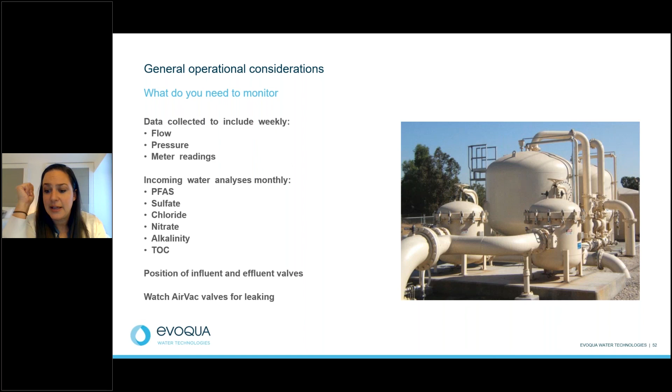Entrained air, let us know if your well is known to have entrained air. Entrained air can interfere with ion exchange and with adsorption occurring. It's kind of like fouling, it gets in the way of those things happening. So if you have a well that has an entrained air issue, we may need to resolve that prior to treatment with one of these medias.

You also want to use your pre-filters to prevent any particulate matter, biological growth, anything at all possible. We talked about resin having these hands. If those hands all have gloves on or are covered in a blanket, they can't be grabbing PFAS. So keep your beds as clean as possible, whether it's the daily flushing to prevent biogrowth or the 5 micron pre-filtration.

Another thing you want to monitor and avoid is resin or media loss. Loss can occur with carbon most commonly during backwash. If you ramp it up too fast and you blow it out the top, you can lose some media. Resin, not too easy for it to happen. We never ever backwash. But if a screen breaks, sometimes I've seen in those cone ones that the little nozzles will come undone,